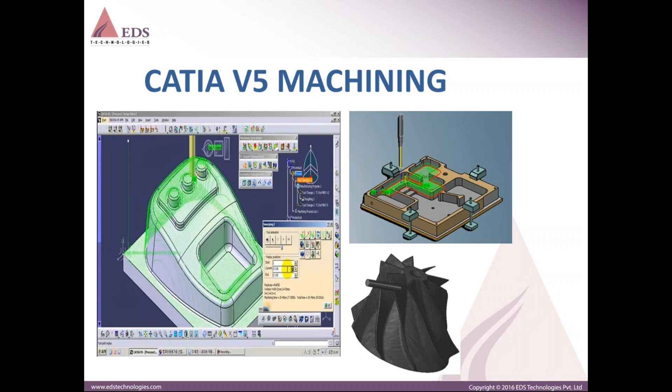This is how the Catia V5 GUI looks like. And why Catia V5 machining? With Catia V5 machining, we can generate the NC programs for 2.5 axis milling, 3 axis milling, 4 and 5 axis milling, and also for turning operations, which is nothing but the lathe machine. We can generate the turning operations for the lathe machine, and the milling operations for the milling machine. So all these capabilities are available with Catia V5.

And it is very useful. Suppose we generate one NC program, and I want to generate the same operation on a different surface, there is no need to recreate everything. Just copy and paste the same operation and modify the axis, so that we can reuse the same operations wherever we require, and we can reduce the NC programming time also.

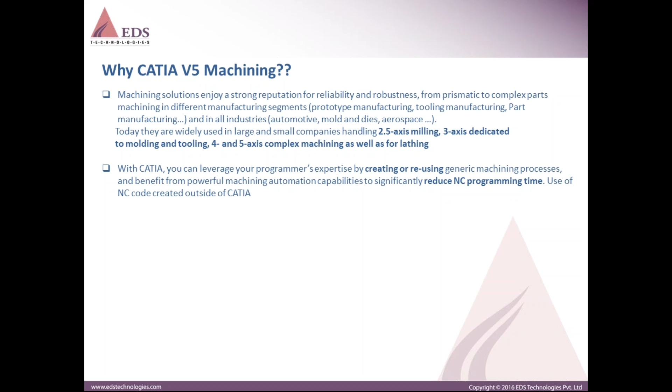And Catia V5 is capable of machining without any collisions in the first attempt. We can have FTR 100% by using Catia V5 machining. And as I told, there are some customized options like optimized roughing strategies already available, and it is capable of high-speed manufacturing for hard materials.

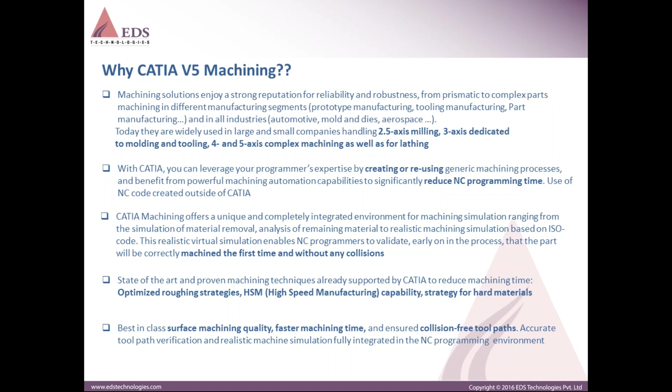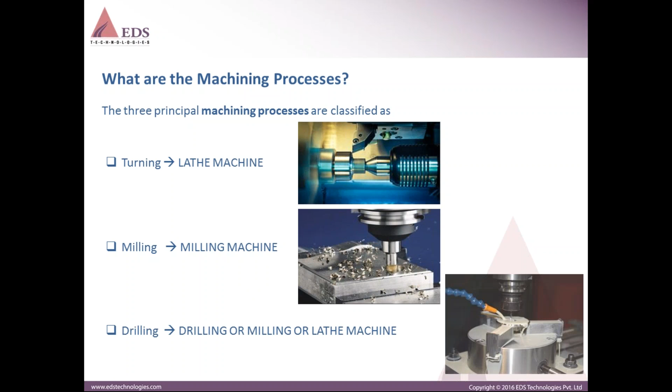Normally, what are the machining processes? There are 3 principal machining processes classified in our manufacturing industry. One is turning. Turning operation can be done on a lathe machine; this is one example. And milling. Milling can be done on a milling machine, and this is an example of how a milling machine looks. And drilling. Drilling can be done by a drilling machine, milling machine or lathe machine, like drilling holes as per our requirement. So going to the next slide.

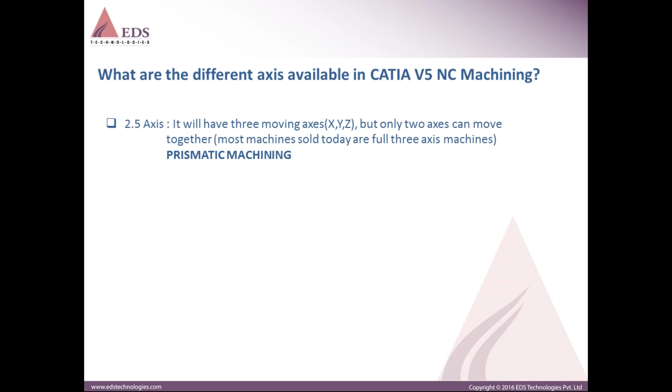And what are the different axes available in Catia V5 NC machining? As I told previously, 2.5 axis. 2.5 axis means we can do the machining operations in X, Y, Z direction, but at the same time we can do only in 2 directions. It is capable of doing in 3 directions, but at the same time it can move in X, Y or Y, Z or ZX, which is nothing but prismatic machine we call as.

Coming to 3-axis machine. 3-axis machine, at the same time we can move the tool, we can generate the tool path with XYZ direction at the same time, which is nothing but surface machining. And coming to 4-axis, everybody knows only up to XYZ, but what is this 4 and 5 axis? These two are nothing but rotationary axis. If you go to 4-axis, we can move at the same time XYZ and also one rotary axis. At the same time, we can rotate the spindle or rotate the workpiece, and it can move at the same time in the 3-axis.

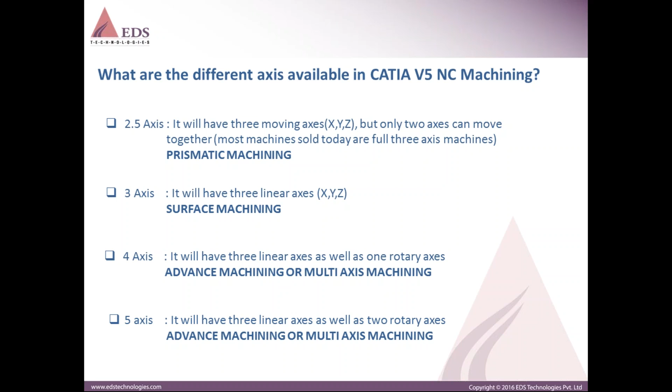And coming to 5-axis, the same thing. It's one more rotationary axis. Both the spindle can be rotated, or holder can be rotated, and the workpiece can be rotated, and also at the same time 3-axis can be moved. So at the same time 5-axis can be simulated by using 5-axis, which is nothing but advanced machining or multi-axis machining, for 4 and 5-axis we can call as.

Post processor, controller, machining axis, design stock, rough stock, Z value, fixtures, safety plane, machining tolerance, scallop height, check surface, part surface, tool selection, macros, approach and retract, feed rate, spindle speed, NC code, roughing, semi-finishing, finishing operations, side machining operation, contact machining operations, spiral milling operation, pocket milling operations, etc. I will just showcase in the tool GUI what are those exactly and where it has been located.

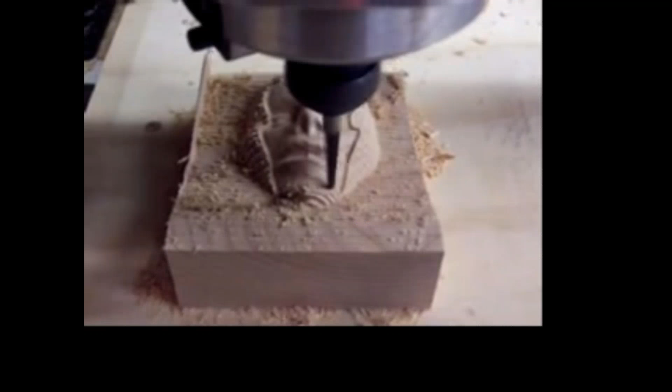But before that, I will just show you two videos which explain the difference between 3-axis and 5-axis. Later, I will show one more video which is... See here, workpiece is not rotating, holder is not rotating, but it is capable of moving in 3-axis at the same time.

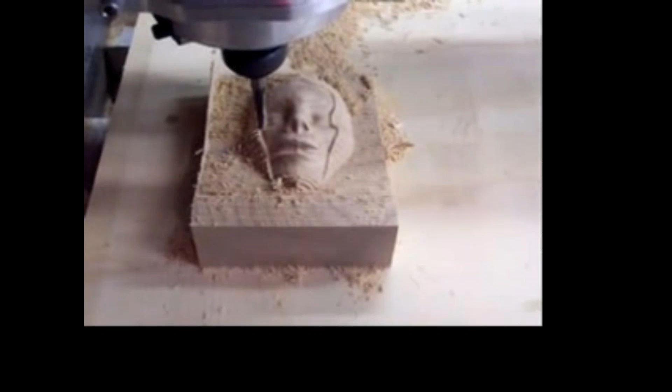So this is 3-axis in which I can say the workpiece is nothing but the bottom wood one, and the holder is nothing but the hole which holds the tool. So these two are not rotating, but it is able to move in XYZ axis. And coming to 5-axis,

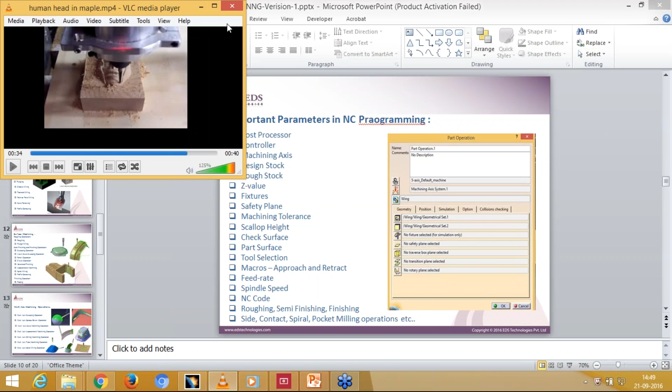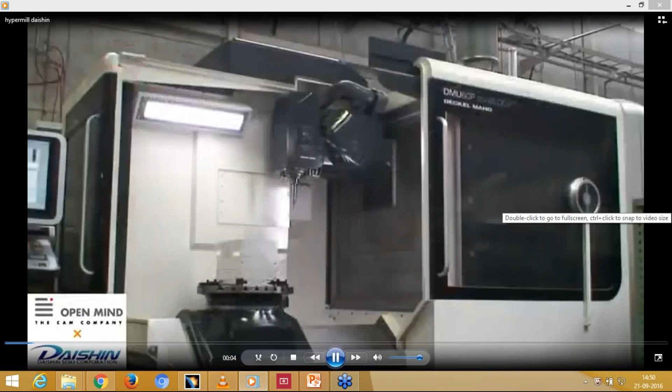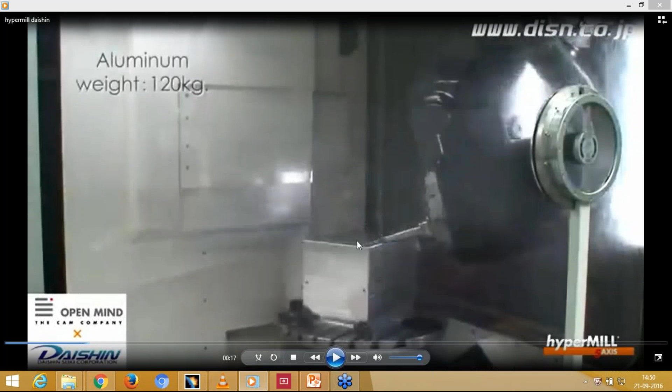see here, workpiece is rotating in the bottom and the tool holder is rotating in the top, and it is able to move in XYZ axis. So at the same time 5-axis it is able to move and do the milling operation.

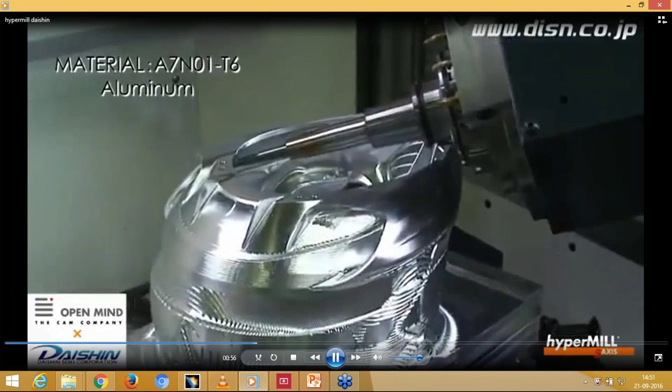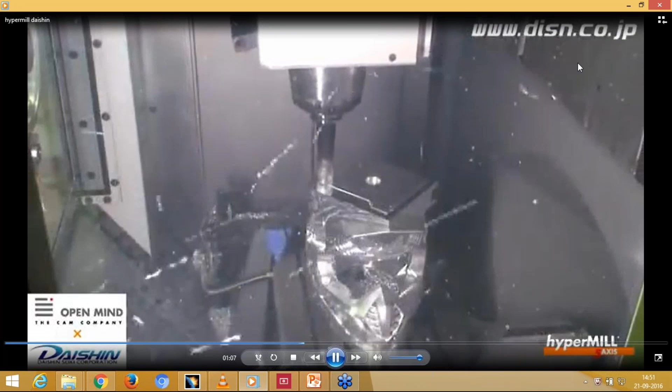Hope difference between 3-axis and 5-axis is clear. And now I will show what are those 5-axis exactly.

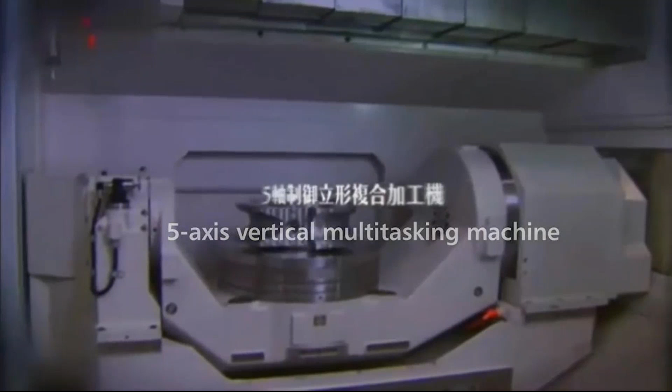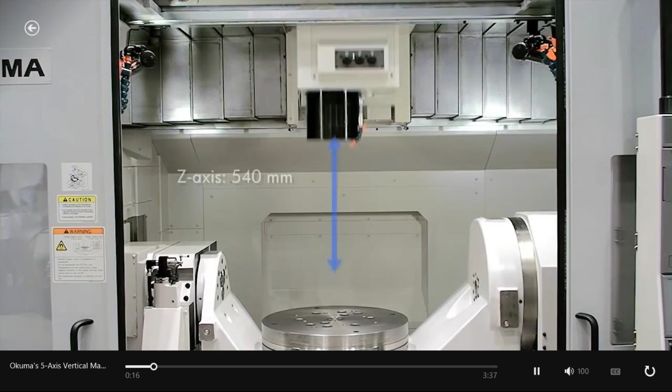This is x-axis, this is z-axis, and this is y-axis, and this is a-axis, and this one is c-axis.

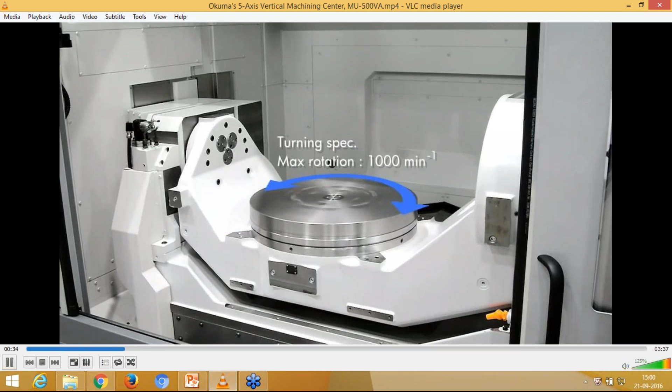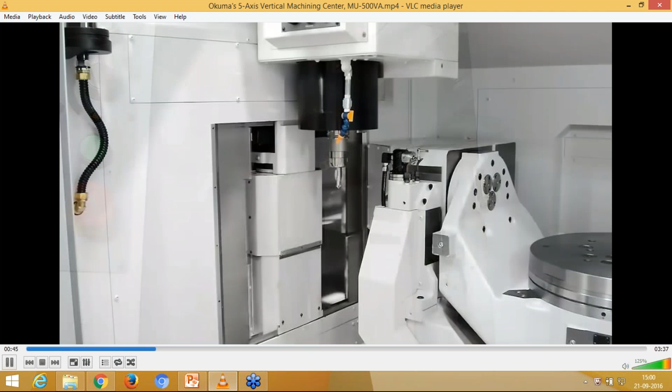Just I will continue with the same video. So what it is trying to say is there are 5 axes for CNC machine, and these are all the tools which are available, in which it is trying to change the tools. So this is how, I think, the difference between 3-axis and 5-axis is clear, and also what are all the 5 axes available in Catia V5.

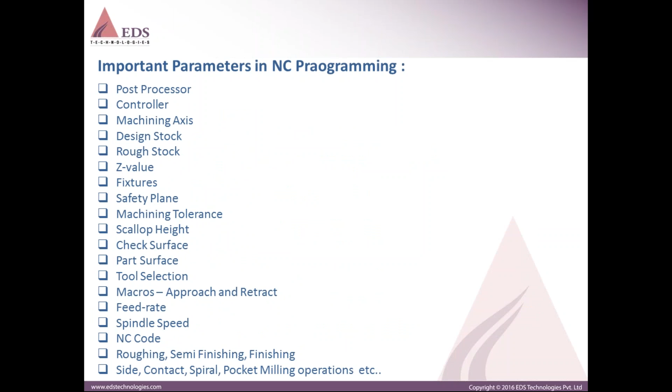So important parameters, coming to this point: post processor. Post processor is nothing but, if you buy a machine, whether it is 3-axis or 4-axis or 5-axis or 2.5-axis, you need to buy a post processor separately, because it won't work if you only buy the Catia V5 license. You have to buy also the post processor.

But for 2.5 and 3-axis, Catia V5 already has an inbuilt post processor, which is able to support CENIT, IMS, etc. But if you come to 4 and 5-axis, you need to buy a post processor separately. The details of the machine you bought, whether it is a turning or milling machine, should be sent to the vendor, so that he will generate one post processor and give it to you.

But the thing is, the post processor plays a major role while generating the NC programming output. And the controller, you will automatically come to know which controller you are using, like Fanuc is one example. This controller and post processor act for generating the NC machining output in G codes and M codes.

And coming to machining axis, you need to select one axis in which you are trying to do the machining operation. From that center point of the axis, you need to put the starting point of the tool at a distance more than your workpiece size, which is in the z-axis. The z-axis is always very important for Catia V5 NC machining: if the workpiece height is 100 mm, you need to maintain a distance between the workpiece end and the tool tip of at least 50 mm to 70 mm, so that there won't be any collision initially while programming on the workpiece.

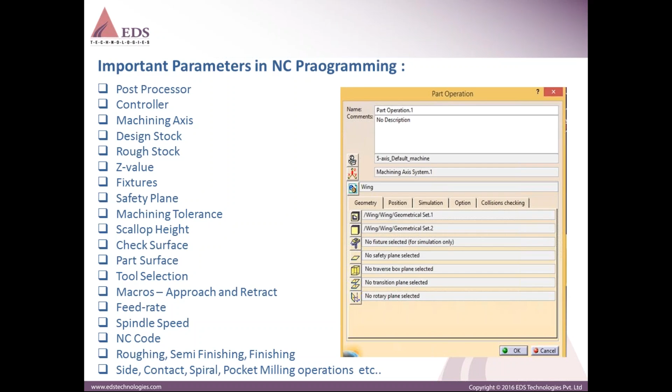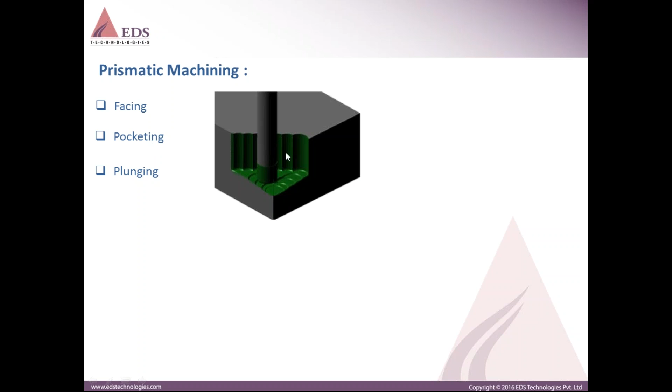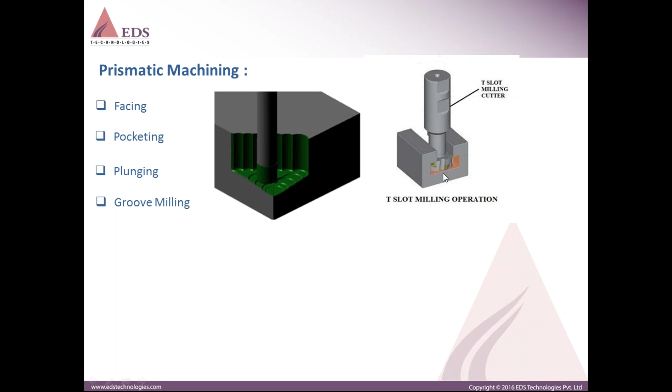So coming to prismatic machining, in Catia V5 there are a lot of operations for 2.5 axis. We can do facing, we can do pocketing, we can do plunging. Plunging is one of the roughing operations. If I want to remove the material at a single stretch, the tool will be very hard, and at the same time see how much material is getting removed. Groove milling, T-slot groove milling, depends on the tool which is available in your manufacturing unit. This is how it can remove the material.

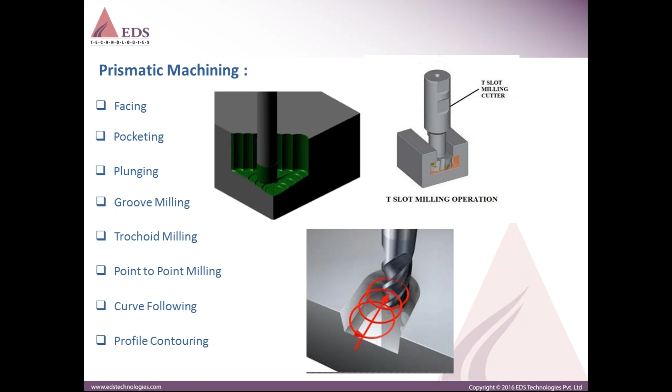Trochoid milling means it will move in a circular manner and remove the material. Point to point milling means we can give it from one point to another point. Curve following, if you want to follow a curve for machining, we can give that. Profile contouring, if you want to follow a profile, even a complicated profile, we can do that.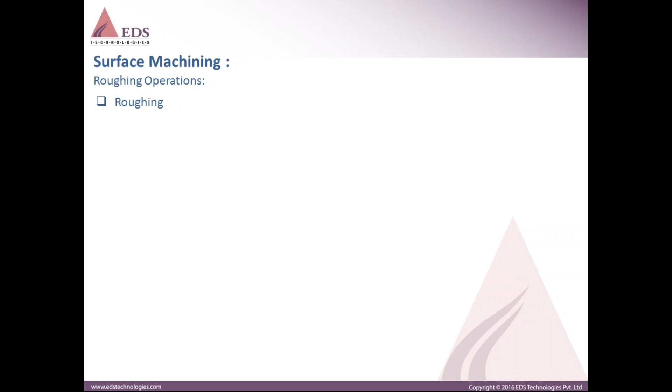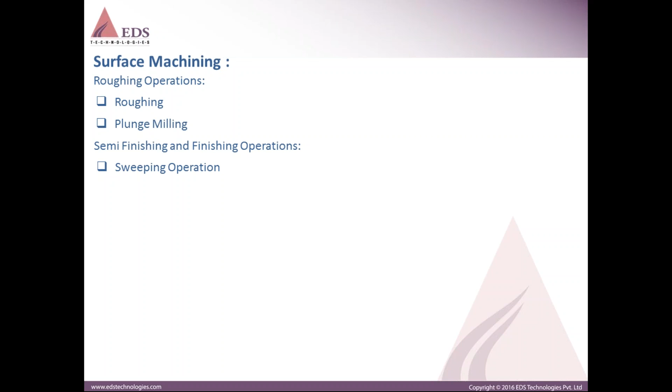And coming to surface machining, prismatic machining is for 2.5 axis and surface machining is for 3 axis. Roughing operation and separated roughing operation are available in Catia V5. Plunge milling, as I explained in the previous slide, and semi-finishing and finishing operations. A sweeping operation we can use as semi-finishing or finishing. If we want to remove more material, better to include a semi-finishing operation. If less material needs to be removed, we can go with the sweeping operation. This is how the sweeping operation will be done.

4-axis curve sweeping. These are similar operations, but here it looks like a sweeping operation. In a single axis, it can mill all over the surface by having this path. But 4-axis curve sweeping means the tool will run normal to that surface. If it comes to the curve here, it will be normal to that surface. So it depends on your requirement, which operation you want to do.

It's up to you. Pencil operation means if any small corner should be sharpened, that is available. Z-level operation means for each and every level, say from 10 mm to 5 mm, I want to do the machining operation at the same stretch by giving 5 levels. I can do a Z-level operation. Advanced finishing is a finishing operation. It is like a sweeping operation we can give.

Isoparametric means for every surface there will be isoparameters. While creating the surface for NC machining operation, it is very important how you are creating the surface. If you are having the isoparameters in an irregular manner, the same path will be followed by the tool, because the tool always will follow isoparameters. So for isoparametric machining, while creating any surface, you have to think that it should be created as a face, meaning at least a minimum 4 corners should be available for a surface.

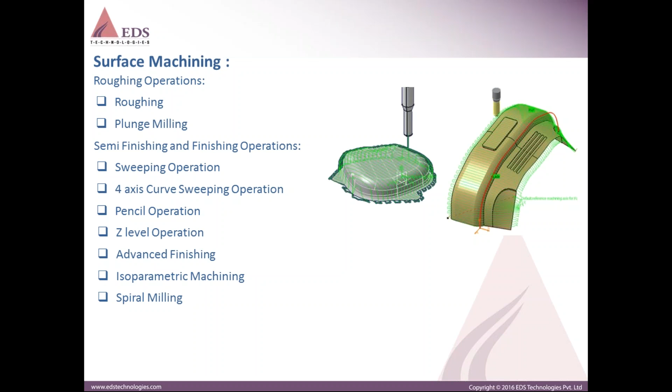Spiral milling. It is capable of profile contouring. It is capable of finishing operation. If you come to probing, suppose if I want to finish like wall painting, you can see in the advertisements how it looks like. The same thing, probing also you can finish in a very smooth manner. And this is one of the probe tools which is available.

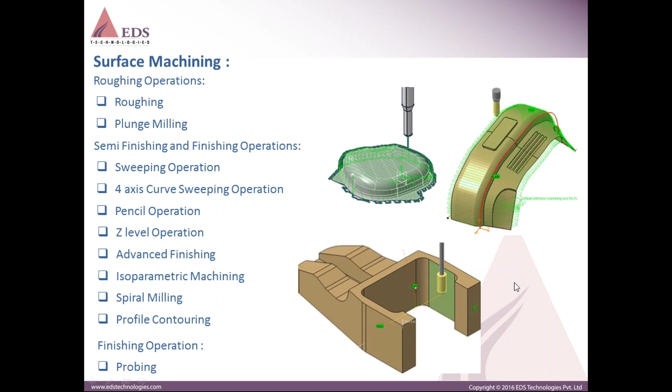These are all ever capable with Catia V5, which is nothing but the 3-axis and multi-axis machining operations. Multi-axis sweeping operation can be done.

See, for suppose a spherical sphere, we can give multi-axis, meaning it can move in 5 axis.

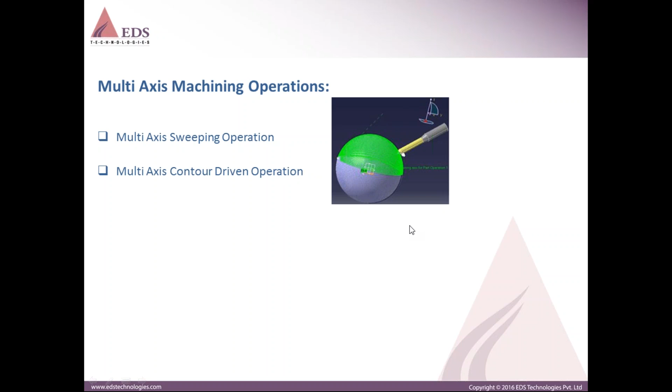Multi-axis contour driven. See, we can follow the path like this. Multi-axis curve machining, it is nothing but a side operation we can say. And from here, this axis to again this axis vertical, we can change the axis while going towards the operation.

Multi-axis isoparametric operation. As I told, the isoparameter should be in such a manner that all should be connected. Suppose this is part 3, one surface, part 2 is one surface, and part 1 is one surface. These 3 surfaces should connect with respect to the isoparameters. Like that, we need to design the surface.

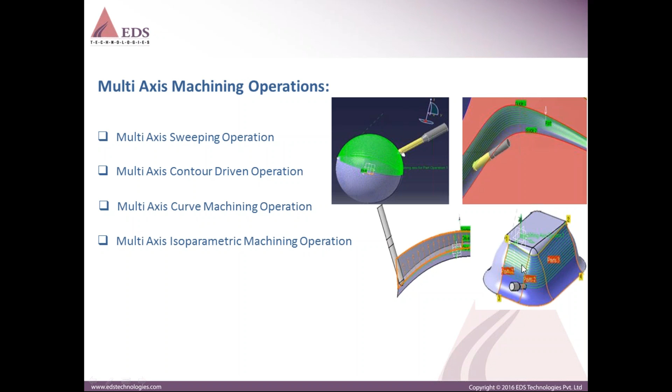Multi-axis drilling operations, it is capable of drilling. Multi-axis tube machining operations, it is capable of tubing operation. Inside and outside also we can do.

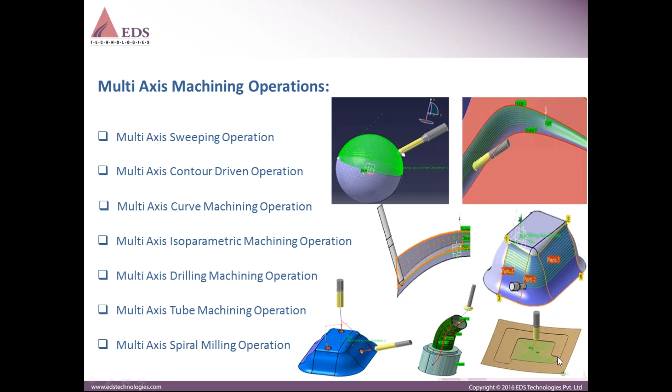Multi-axis spiral milling operation, this is from outwards or inwards, whatever it is, we can do the spiral milling. Spiral milling for 3-axis means it can do only on a flat surface, but here it is a curvature surface. We can do multi-axis spiral milling operations.

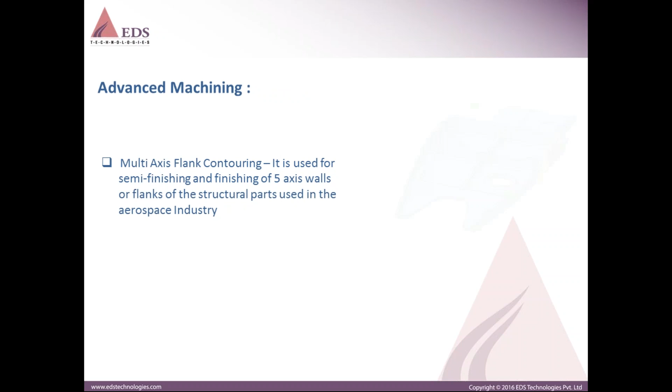These are all some advanced operations which are available in Catia V5. Multi-axis flank contouring is normally used for semi-finishing and finishing operations of 5-axis walls or flanks of structural parts used in the aerospace industry. See, you can machine like this all the walls for a structural part for the aerospace industry.

There is one case study with Catia V5. The company is Arc International from France. They have 16,000 employees, and it is a glass and tableware manufacturer. They have used NC programming with Catia V5, and they have reduced 25 to 40% of NC programming time, and saved 123,000 euros per year. How much they have got impacted by using Catia V5, you can understand.

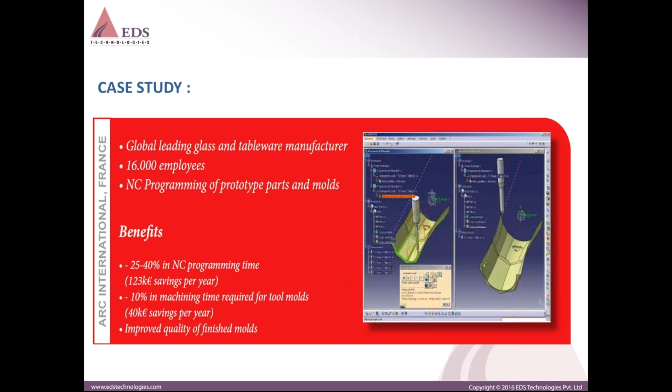10% in machining time. NC programming time means the designer or NC programmer who has done the programming on tool, and due to that they have even reduced machining time by 10% for the molds, and have saved 40,000 euros per year, and we can get the well quality of finished molds.

So before going to that, I just want to show some videos of the advanced operations I have told about. Suppose spiral milling.

In Catia V5 GUI, you can see it divides into product, process and resource structure. All the manufacturing operations or NC programming we have done will be included under process. The product you have modeled or designed will be under product. And the tools or resources you are using will come under the resource list. Once you open any NC programming window, you can see this PPR structure directly.

So process means manufacturing or machining operations performed will be reflected. Product means the model you have done should be given as input here, and resources means whatever tools you are using, you can see directly here.

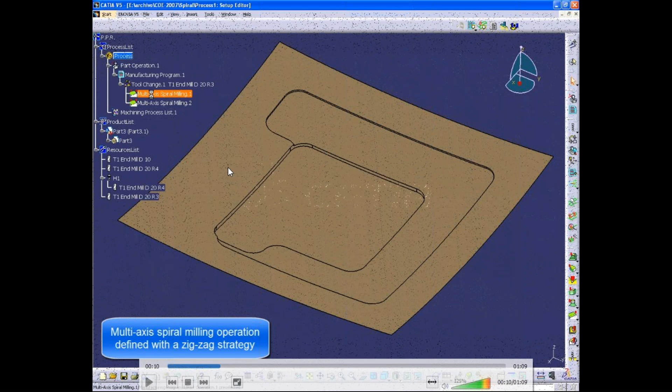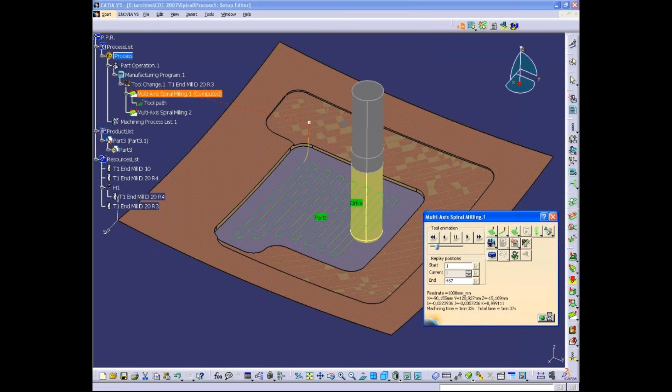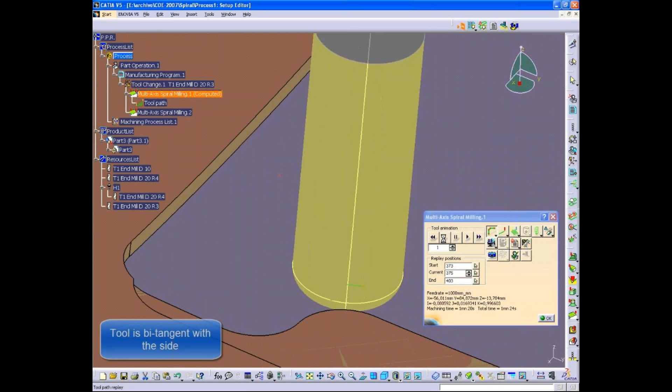If you see spiral milling operation, just click on the top face. There are different ways you can do the milling operation, or you can modify the paths as required. You can simulate it at each position wherever you want by placing the tool, checking whether it is hitting the side or not, or how much gap is maintained.

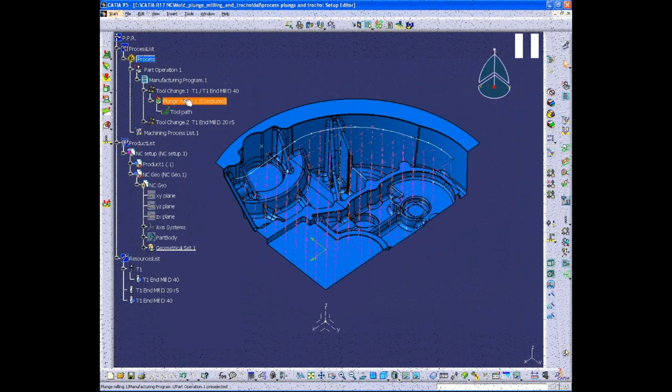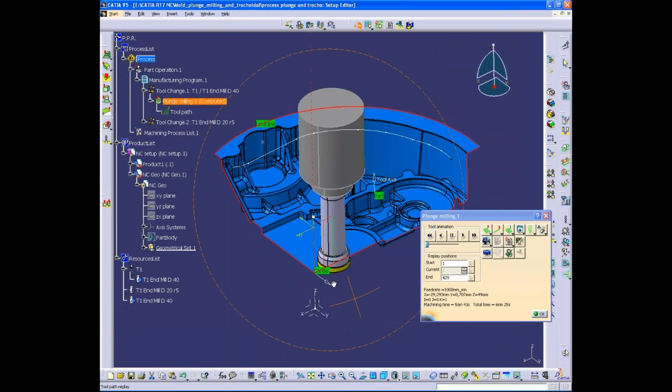One more operation is plunge milling, I will show you how it looks. So I have this design. This is the initial roughing operation where, at a stretch, I want to remove the material, and this is nothing but the rough stock I mentioned. You need to prepare both the design and rough stock.

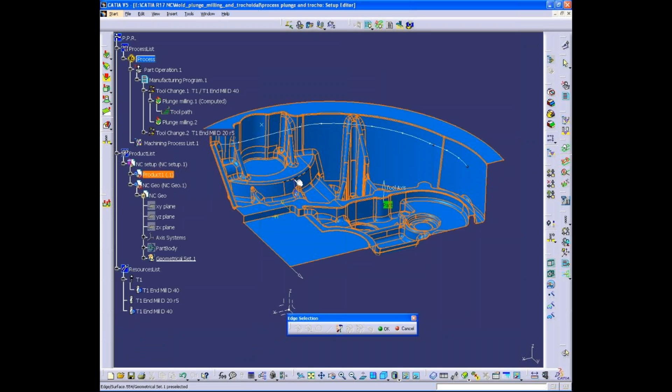That is the plunging operation, and we can even check and simulate it while the tool is hitting anywhere. Here we can see the outer transparent one is the rough stock and the dark blue color is the design stock.

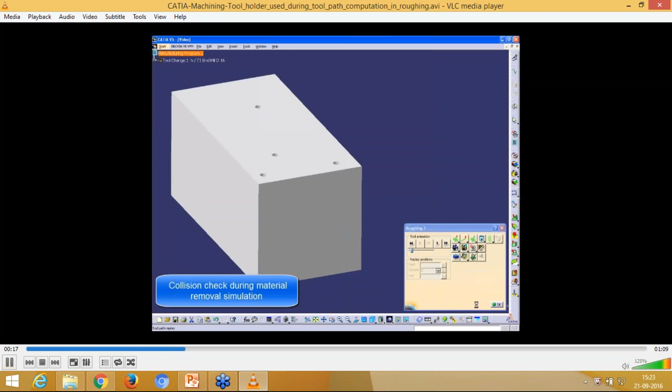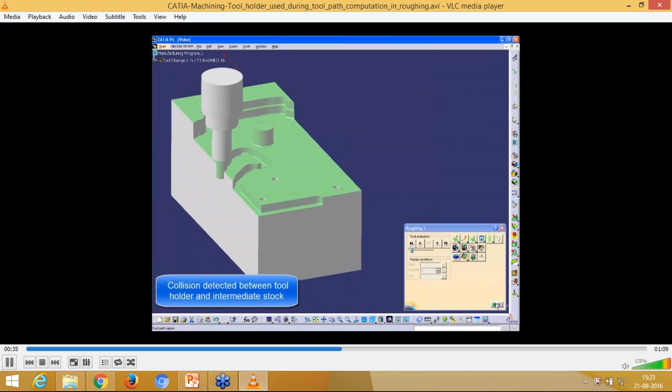This is simulating the model as per the operation given. But somewhere it is hitting, so it will stop. Here it has been hit by the tool with respect to the workpiece, which shows in red color - collision detected between tool and holder, and tool holder and intermediate stock.

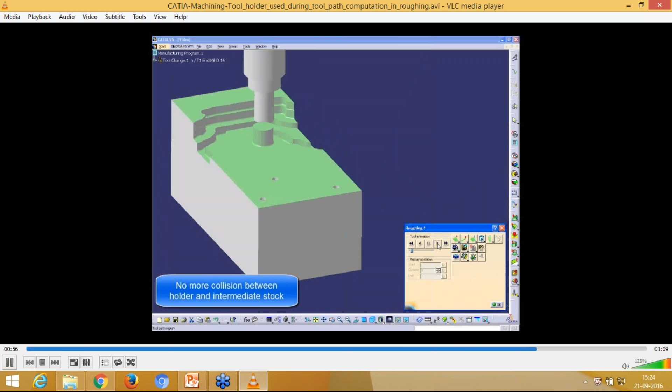He modified it by going back to V5, and is simulating again. So instead of going to the machine first, we can simulate here itself and provide the information to the manufacturer. Now it is running smoothly because he modified that.

So what I want to say is, once you take the output from Catia V5, the G codes and M codes - by simulating directly you cannot give this to the manufacturer. The intermediate tool - because here you are simulating only the rough stock with respect to the tool and the tool holder - but we need to check one more point: whether that tool holder is hitting the actual machine or not, we don't know.

If you give the program directly to the machine manufacturer, and the tool holder hits the machine, it is very dangerous to the operator also. So Catia V5 has the capability to check up to the workpiece and the tool holder only.

But if you want to check even with respect to the machine, first you need to design the machine and give the kinematics - how much it is able to rotate the workpiece, or how much angle it can be rotated by the tool holder and all. Then you need to give that as input to Catia V5, which is a little bit hectic. But Delmia V6 is capable of simulating with respect to the machine also. Catia V5 is limited to the workpiece and the tool holder only.